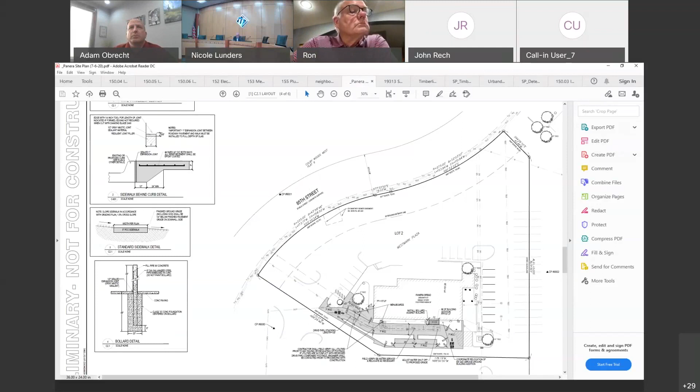So that's it in a nutshell. Again, the PUD amendment specifically is for only this lot, which Panera sits on, to allow a drive-through lane, which typically right now is not allowed by the PUD, and to allow a queuing length of 130 feet opposed to the 150 feet. And then the site plan itself is what you see here on the screen, which is how the drive-through window would actually work. Planning and Zoning Commission does recommend approval of both items and would be happy to answer any questions. All right, thank you, Steve.

Any questions from the council for Steve?

Steve, Dave Russell here. If we make this amendment, would other businesses in the PUD at a later date also be able to have a drive-through? Not without coming back and requesting a separate PUD amendment, because this amendment only applies to Lot 2, which is only the Panera building. Okay, thanks.

All right, thank you. Any other questions or comments at this time from the council? Yeah, another quick question, Steve. So if for some reason Panera is not the future occupant of this building, is there any concern about the drive-through not being long enough?

Good question. That's probably going to boil down to who the user is. Maybe, I think is the honest answer. We'll have to see who goes in there. I think it's going to be a matter of realizing what you've got, and if we get other tenants or businesses that complain about things being blocked, or if staff notices issues, that's going to generate a conversation about how we can alleviate the situation. The hope is that this will allow Panera Bread to stay there indefinitely and meet their business model, but the honest answer is we'll cross that bridge if we get there. It's certainly possible it could be a concern with another user, and if we find it to be a concern, we'll address it and see how we can get it resolved.

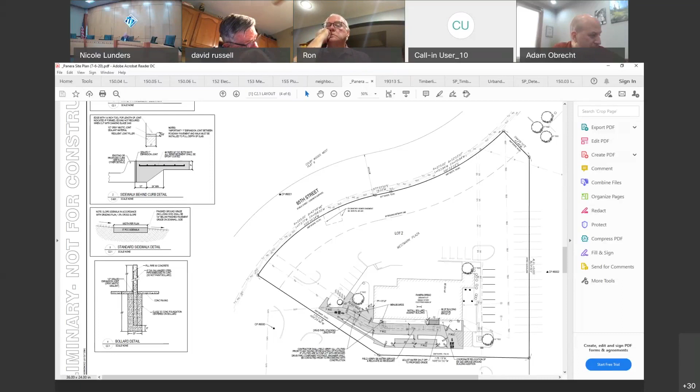Steve, I guess you've presented both the PUD and the site plan together as one. Is the PUD more to allow the drive-through and the site plan more what we're talking about? Correct. The amendment to the PUD would allow the drive-through to be there. The site plan itself is what you see here on the screen, how they would actually construct it on the property. So the motion in front of us is more to allow the drive-through, and our next motion is more of this discussion.

Correct. And we sometimes do take PUD amendments and site plans together at the same time. We're essentially doing the same thing, but it's still 2 votes.

All right. Remind me who made the motion and a second again. I had a motion by Blake and a second by Obrecht to approve the amendment to the master plan. Okay.

Is there sentiment to vote? Do we move forward with the vote? Since I raised the question, this is Ron, I can tell you that I'm comfortable and we'll go ahead with it. Okay, so we have a motion by Blake, second by Obrecht. Any further discussion? I do have several votes in. Are you still getting that option to vote if you have not done so already? Oh, there it goes. Okay.

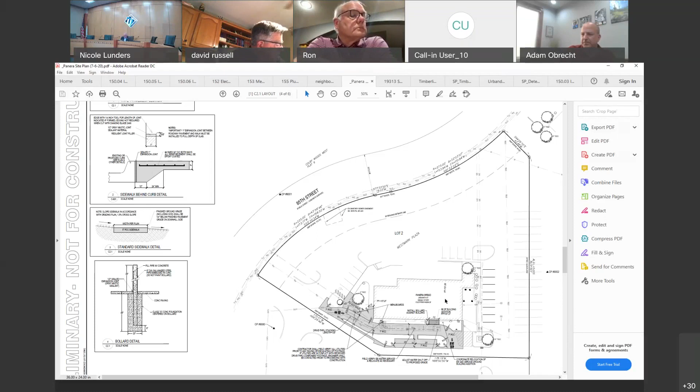Okay, the item passes.

Thank you. Moving on to item 8, the planning and zoning items. First is 8.1, the Panera Bread drive-through site plan at 2839 86th Street. Steve, anything further to add? Okay, with nothing further to add, then any questions or comments from the council before a motion and a second?

Now I'd ask for a motion. So a motion by Blake. Second by Russell. Okay, discussion. Please vote.

Councilmember Carberry, oh, there it comes through, just a bit of delay. Thank you. And that passes. Thank you.

All right, item 8.2 is the New Hope Assembly of God parking lot expansion site plan at 4425 70th Street. Steve? Sorry, forgot to turn the mic on. This is a site plan for adding parking spaces to the existing church on 70th Street. I will see if I can get the site plan up here for you.

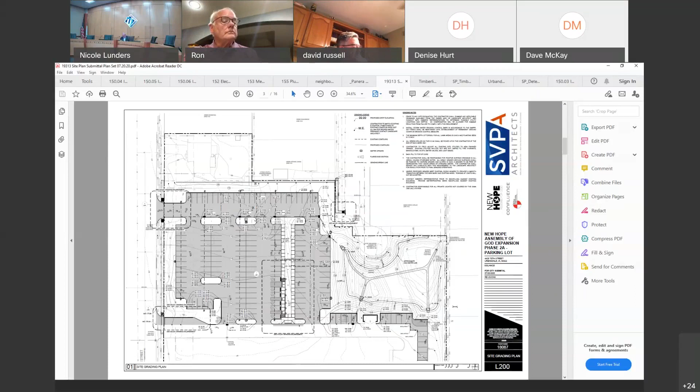That passes, thank you. Item 8.3 is the Timberline Village PUD Plat 2 preliminary plat at 142nd Street and Douglas Parkway.

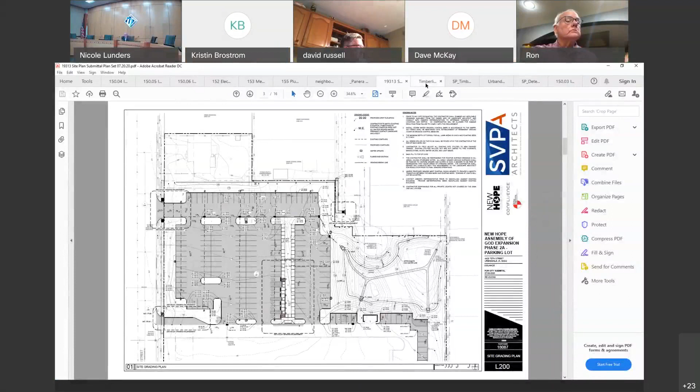Okay, like I did previously, I'm going to briefly show you 8.3, 8.4, and 8.5, these last three P&Z items, because they are all directly related to each other, and then you can take the appropriate action on each of those. Let's go back here and try to share the screen. Okay, are we good, Nicole? We're good, okay, all right.

So this is the plat. What this does is create one buildable parcel. This is the southwest quadrant of the roundabout at 142nd and Douglas. Douglas is up here, here's 142nd, and you can see the circle of the roundabout right there. This is that southwest quadrant, and right on that corner, this plat will create one 2.45 acre parcel, and you see the outline of that parcel here right on the corner. And then there are two outlots.

One is this bigger space in the middle for future development to come along, and then this last parcel is another outlot, which is a regional detention basin for this entire parcel. So item number one is just the plat creating the one buildable lot and the two outlots, one for future development and one for a regional detention basin.

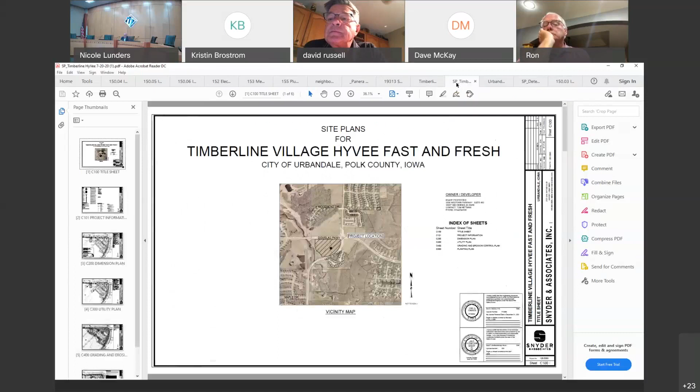The second item is a site plan for a Hy-Vee Fast and Fresh. You might recall there was a PUD amendment at the end of last year to allow a convenience store to be located within the first 600 feet of the roundabout, and that was approved subject to some conditions. So this is the site plan for a Fast and Fresh. One of the conditions was that it needed to be associated with a restaurant or a coffee shop of some kind so that people could actually go to the premises and order food.

Another condition is that there needed to be an outdoor seating area, and that's this dark rectangle on the north side of the building, about 505 square feet, which meets the requirements of the PUD. There's also lots of language about pedestrian connectivity, so you can see sidewalks here along the south side of Douglas that will connect over through the drive-through lane and get people to the building.

There's also the walkway that comes across Douglas that would get people down directly to the outdoor seating area with an entrance into the building there. And then there's also access off of 142nd Street, plus additional landscaping being provided as well.

I can go to that sheet here real quick. I don't know how well you can see this, but one of the requirements of the PUD, which remained in place, is that this needs to have 1.5 times the landscaping that a commercial property project would usually have. So there are numerous trees and shrubs on this property, part of which will help screen the use from the existing townhomes down here to the southeast, plus a number of shrubs and trees that will soften what all of that looks like.

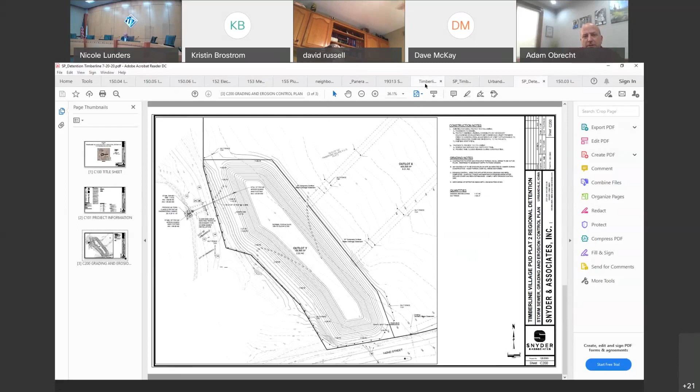Steve, this is Adam. On the Outlot X, kind of that north side, is there sidewalk connecting the trail all the way up to the Fast and Fresh at this time, or is that only if X develops? That would be, if I understand your question correctly, something that would come later. There is going to be sidewalk along 142nd Street, coming along here, and that's going to connect up into the Fast and Fresh. But part of the language of the PUD is, as these businesses develop in Outlot X, we do want that internal connectivity for sure. So that's one of the things we'll be looking at. Does that answer your question?

Yeah, so if Outlot X sits empty for 10 years, we wouldn't have a connection, because there's a trail just up to the west there. Yep, gotcha. There's no connectivity between the trail and the Fast and Fresh. Yep, there wouldn't be. That's certainly something we could talk about, something that could be added to the CIP. Part of what we would want to do is just reserve the flexibility depending on how this develops, how all that might work through there. My hope is certainly when this starts coming out of the ground, and our hope is that this is a 2021 project, everybody's been waiting for this, and we're going to see development here fairly quickly and be able to know what that looks like.

Quick follow-up to Adam's question too. So the trail exits out on the other side of the street. What is the expectation for pedestrians getting across Douglas? Is it to go to the roundabout, or will there be some kind of crosswalk in between? Realistically, for safety purposes - and Dave McKay, add to this - but my thought would be you'd probably want them to come up to the roundabout and be able to cross safely at that location. Dave, is that something you would agree with? Yes.

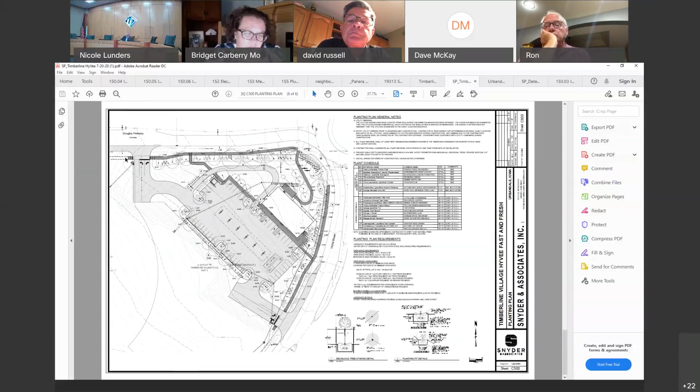It would extend here to the west and here to the south. So it would extend all the way back down to this property line right here, and it would extend all the way to the west, all the way out to that property line right there with sidewalks. So on the south side of Douglas, right through here, and along 142nd Street down to here.

Sorry, my kids are being loud.

So will it connect to the sidewalk that's there on the south side? I guess Adam already asked this, but I'm confused. Yeah, you are correct that right now the sidewalk comes up and butts to the west property line of NAP properties right now, and so we'll connect up at that location on the south side of Douglas.

And then when you go over to 142nd Street, it will connect down to the bridge, which is basically... it would connect down to the bridge, but we can make that connectivity over there. If that isn't on the south end, it looks like there's a parcel in there that's possibly parkland that we might have to deal with, but basically we can make that happen.

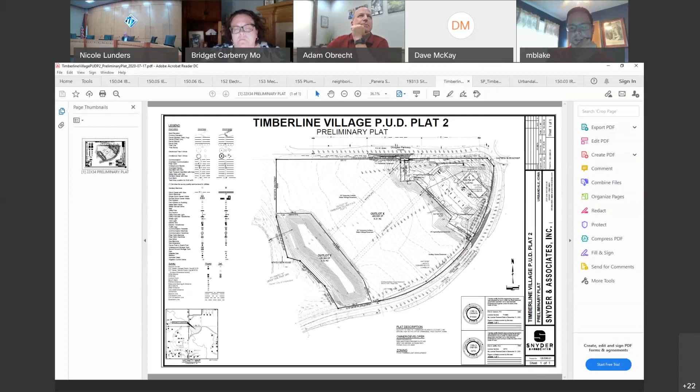Dave, my thought is go ahead. I guess I'm still confused exactly what the question is here. So my fear is the outlet for the trail that currently exists is on the northern side of Douglas, and I would like to eventually figure out a way that we could come off the trail that doesn't require us coming off Douglas.

And to avoid having to cross that street.

Okay, but the trail on the north side of Douglas, you can go off the trail on the north side of Douglas, go north, come back under the bridge and back up onto the sidewalk on the south side. Okay, so I really think now there's a little bit of a jaunt to the north because there's a big grade change between the Douglas sidewalk and the trail bridge and the trail. And so, but there is a connection where you can go north, south, under the bridge, back up on the sidewalk on the south.

Oh, I apologize. Yeah, I only thought it was on the north side. I apologize.

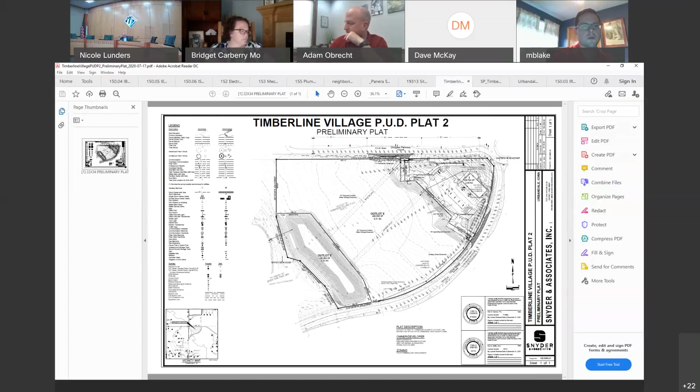All right, any further comments or questions? If not, then I'd ask for a motion and a second on item 8.3. A motion by Obrecht. Second by Pogge. Discussion, please vote.

That passes. Then a motion and a second on item 8.4. A motion by Obrecht. Second by Pogge. Discussion, please vote. Please switch my vote to an aye. Same here. Updated.

That passes. Then item 8.5. A motion by Obrecht, second by Pogge. Discussion, please vote. That passes. All right, thank you.

That takes us to the end of our planning and zoning items. Item 9, regular agenda items. We have item 9.1 first, which is the equipment purchase for the police patrol vehicles and equipment. Chief Trey Hansen would answer any questions if there are any. If not, ask for a motion and a second.